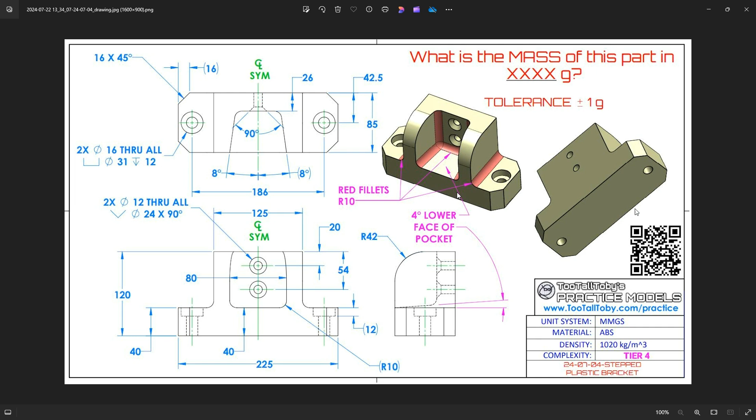So we'll go ahead and design this in IronCAD and show you how we can go about this.

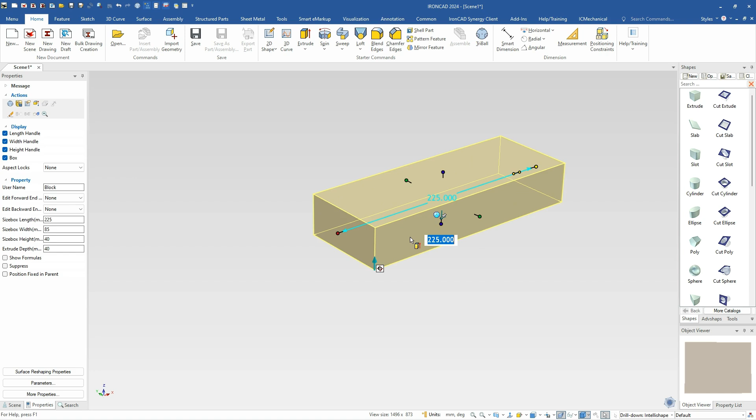First we're going to make sure our units are in the right units. We are in millimeters in this case, so we'll set this to millimeters, and we want a value in grams here for our mass. We'll drag and drop out an extrude and set the values: 225, the width of this thing is 85, and the height we're going to start off with is 40 for that model. So that's the base of our model.

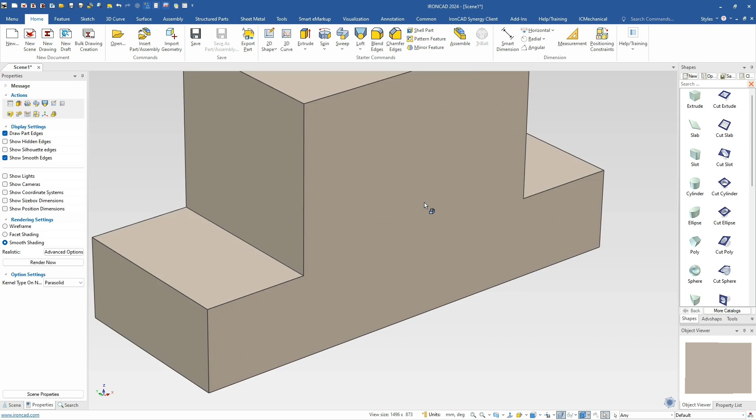Now we can add our next extrude right onto our center point. We know the width of this by right-clicking and dragging is 125, and we'll right-click and drag the other one. Since we're in the center, we can align the side to be smooth connected. Last, we're going to set the overall height from the bottom, which gives us a value of 120. So that's the information we need for the overall size of the model.

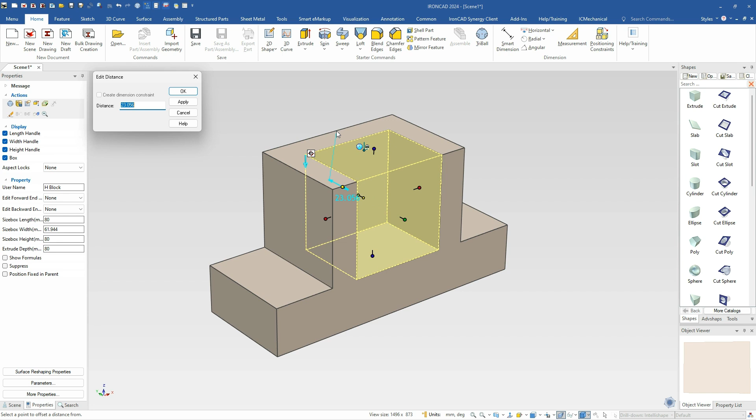Next we'll go ahead and do an extrude cut here. Simple things we can do: align it to the front. We know the width of this is 80, using that right click and drag when you see both handles move, and also aligning to this height because it has a 40 millimeter height from there. Last, again we'll use those same commands to edit the distance from the back edge because we know the distance there is 26 millimeters, so we'll set that as well.

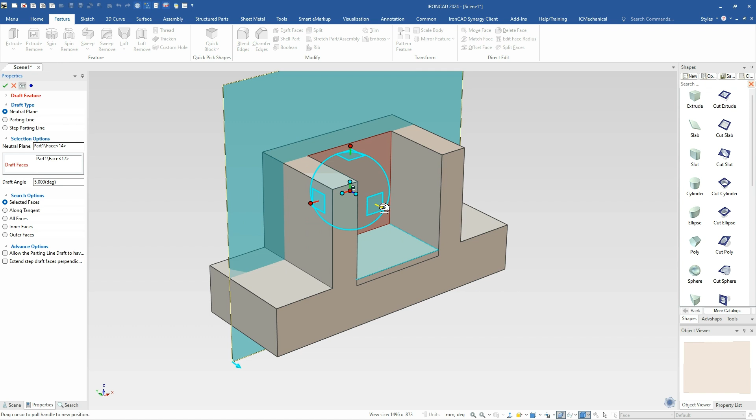Next, we can do a draft on this model, so we go into our feature ribbon and do a draft face, because we know this bottom has a 4-degree draft. It also matters where you pick your plane. For example, if we put the plane here and pick this face to draft, notice the bottom edge moves down, which is not what we want — we want it to stay here and move up. So we can move that plane using the triball. I just wanted to show this, so we redefine this location to the front, and now you can see the draft is from the front edge and drafting up. We put in our degrees, 4 degrees for our face, and hit OK to apply that.

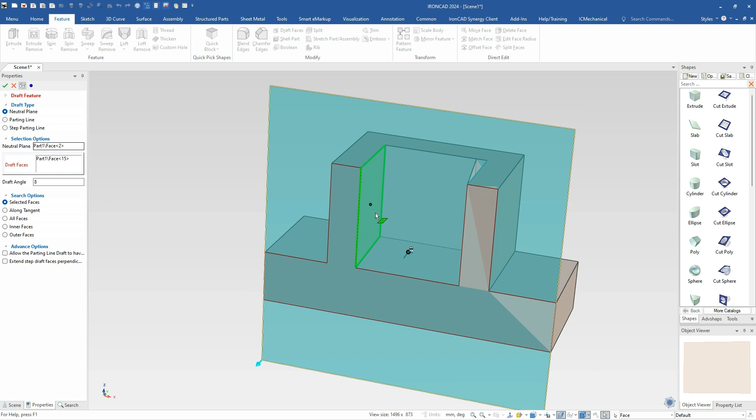Again, you can pick the front face. If we pick this front face, we can put the plane there, and for the sides we have an 8-degree draft as well, so the same thing applies there. We want that front distance to be 80 from here, then drafting in to get that for the model.

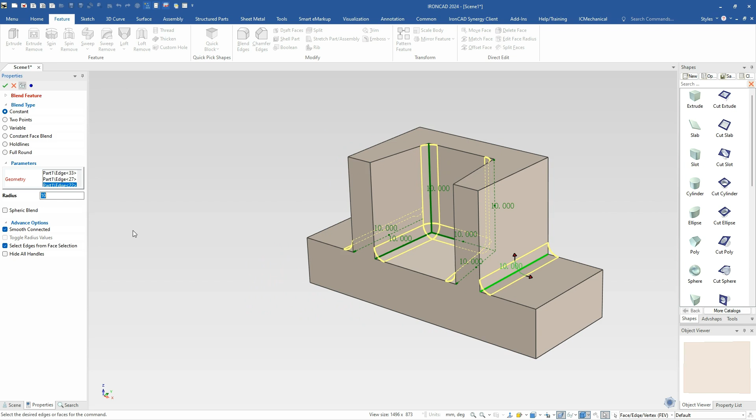Next, we want to add blends. A simple way to do that for these pockets is to grab those vertices, and when you right click and say blend edges, it'll pick up all those edges for us. We need to set those to 10 millimeters, and we'll select this outer edge here and this one as well, and hit OK to apply that. So that gives us the basic shape for our model.

Next, we'll go into our starter catalog, into our mechanical tools, and drag and drop a hole, because we know it's in the center of this, but not actually on the center of that face, so we'll move that in just a second. But we're going to set that counter bore there.

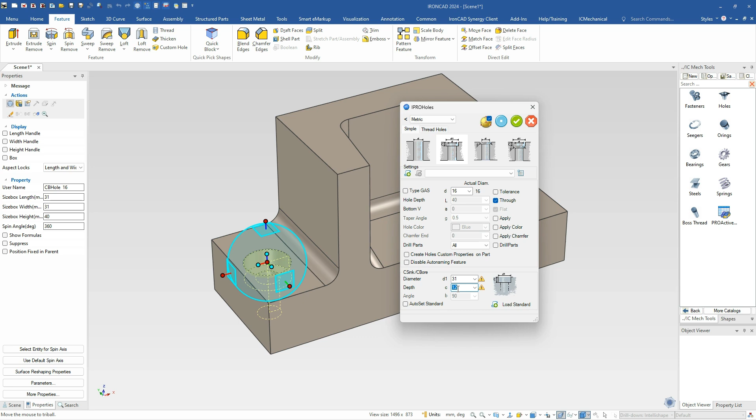It's got a through hole of 16 through, a counter bore of 31, and a counter bore depth of 12. So we can go ahead and apply that.

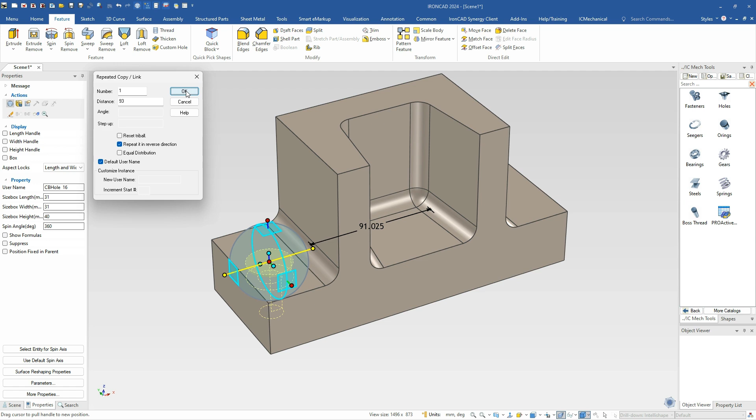What we're going to do is move that to the center, because we know the distance from here to here. So we can move this out with a right click and drag, and say link. We'll make one copy of that and repeat it in the opposite direction, using half of the total distance, which is 186 divided by 2. Hit OK, and that will put our counter bores on both of those. Then we can delete the original shape because we don't need that one anymore.

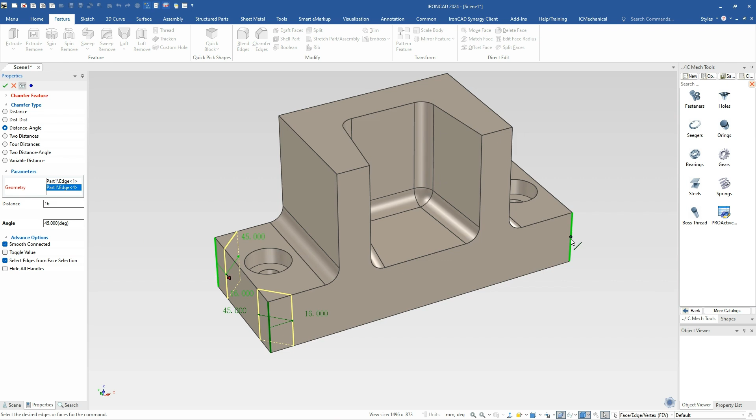That's a simple way to apply that in this case. Now we can go ahead and add our chamfers here. We know this is going to be a distance angle of 16 and 45, the same on both sides, so it doesn't matter which direction we pick. We just pick these edges to apply that, and right click OK to apply those.

One other thing we need to add here is this blend on the front. We'll select both these edges, and we know that has a value of a very large 42 to apply, to give us that front shape there.

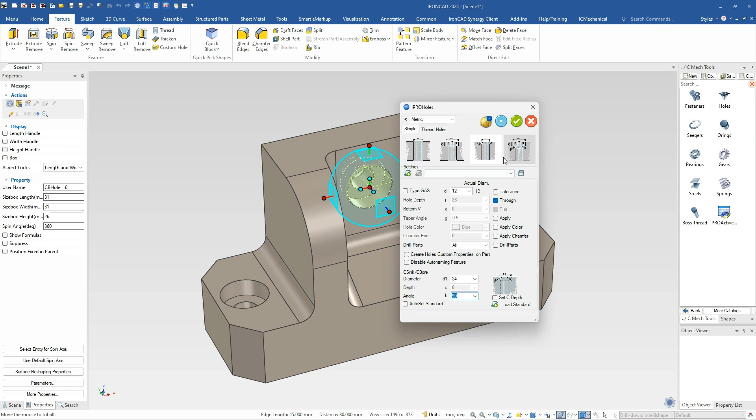Next, we'll go ahead and do the counter drill here. So we'll drop the hole again right onto the center point of that face, and we know that is a counter drilled inside of this case. We know this is a 12 diameter, with a 24 for the drill and a 90-degree angle there. Again, we can apply that.

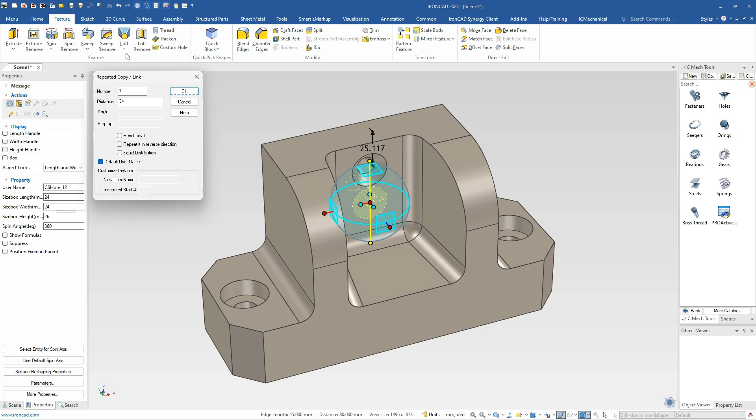Now, what we do know is the first hole is 20 millimeters from the top, so I'm just going to move it right up to the top and drag it down 20 millimeters to apply that. The next one is a total distance of 54 to the center from the top, so since we already have 20, we just right click and drag down, make a link here, and that's going to be 54 minus 20. So you can do the math there if you don't want to do it in your head, but 34 gives you the distance to apply that.

That will give us our overall shape for those inside of there as well. That's all it takes to build this model. Just making sure I got everything built correctly here, so we can rotate around to see everything.

Now we can go into our mass density here, which has a mass density of 1020. We hit tab, and that should give us a value of mass of 1243 for this model. Let me just double check everything to make sure that is looking correct.

And again, we have our counter bores there. If we want to select these two hole edges, select the edge and select the other edge, you can get that distance again as 186 for that as well. So we can get that distance as well.

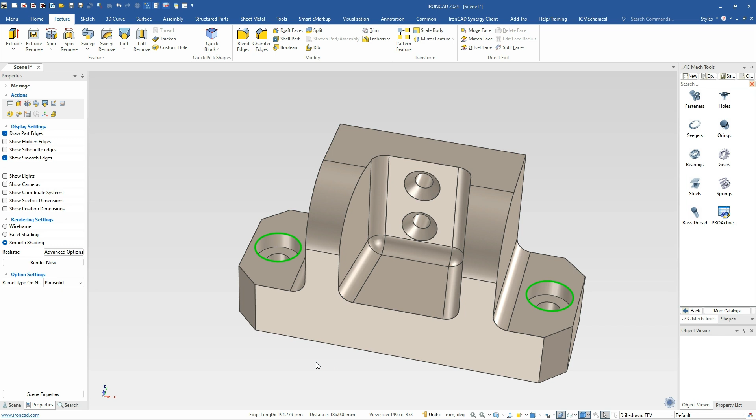That's pretty much all it takes to build this model inside of here. If you want to get the front to the back just to see this, you can get those distances as well, which is 85. We set the starting point here as 225 as well. So I'm just showing you these on the bottom so you can see all the measurements inside of here without putting any dimensions on the model itself, but that's all it takes to build that.